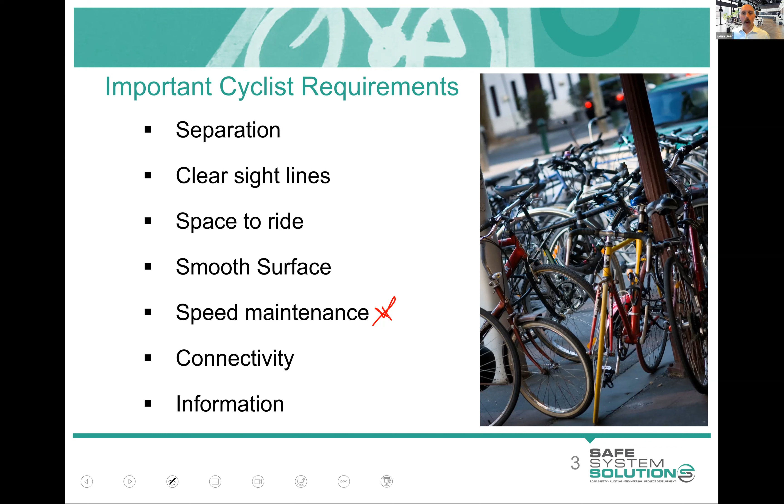Now, there are these high-level principles to think about with cyclists and cyclist requirements and safety, and I've listed them there: separation, clear sight lines, space to ride, smooth surfaces. Speed maintenance is an interesting one, and I will come back and explain how that's a safety-related thing. For a rider to be able to continue at a certain speed, not stopping and starting. Connectivity and information, to warn, inform, guide, and the like. But we'll get into it.

Really, we want auditors to think like cyclists and think, where am I going to ride here? Would I feel safe doing this? Would I feel safe turning here? Oh, if people open their doors, am I in that dooring zone? All of those questions. And most auditors have ridden bikes in their life at some point, so they can get a good idea of how that might feel.

There are these thematic specialist audits we call cycling audits, where you definitely have to ride through the area, and you really hone in on particular issues for cyclists, and you can sometimes ignore issues for other road users because of that thematic audit nature. Now, sometimes I and the audit team will ride the route anyway, just because we think that's an interesting view. So it may not be a thematic specialist road safety audit for cyclists, but we still do that.

Just remembering one that I was in the audit team for, up in Bendigo, the Napier Street duplication. I certainly rode that one just to get a feel from that cyclist perspective. It's not the way that I would usually ride on that, so I had a look at it, drove it, and walked parts of it as well, so you get that nice rounded feel. I didn't ride it on a motorbike, but that's a possibility as well.

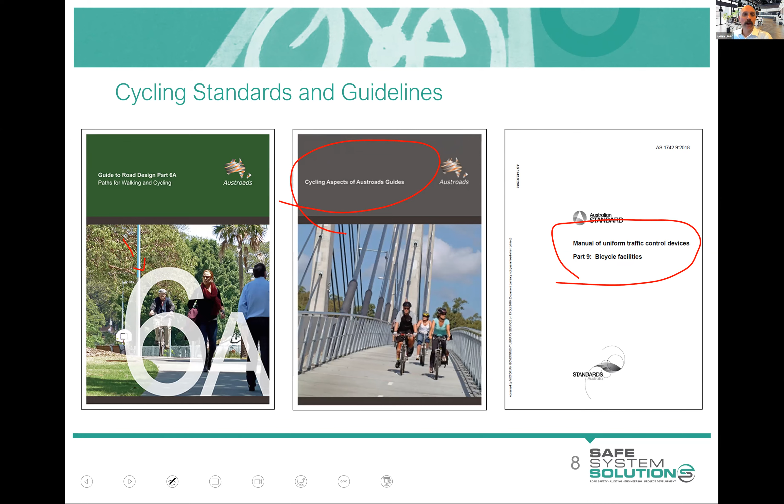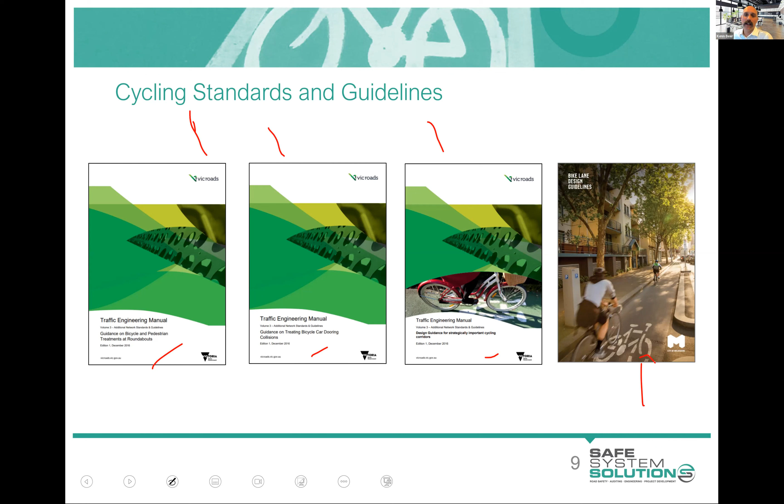That's the Australian standard. This document, Cycling Aspects of the Austroads Guides, collected together a whole lot of different bits and pieces around cycling from different guides and different Austroads documents, and consolidated them into one document, which is a pretty nice document. Then each jurisdiction just has heaps of stuff. We were involved in putting these ones together for VicRoads, which is treatments at roundabouts, dooring, strategic cycling corridors. This is a good one, Melbourne City bike lane design guidelines.

And then if you go broader beyond that, Queensland's got great material. New South Wales has got some good stuff. And then if you go worldwide, we've got the Bible of bicycle infrastructure design, the CROW Manual, and if you're into this stuff, it's worth getting your hands on a copy because it is really pretty groundbreaking stuff. And then lots of jurisdictions are coming out with different things to do cycling audits, prompt lists, technical guides, and the like. I've put a lot of these into the learning management system for you, so you don't have to hunt them down. So you're able to have a flick through those if you want.

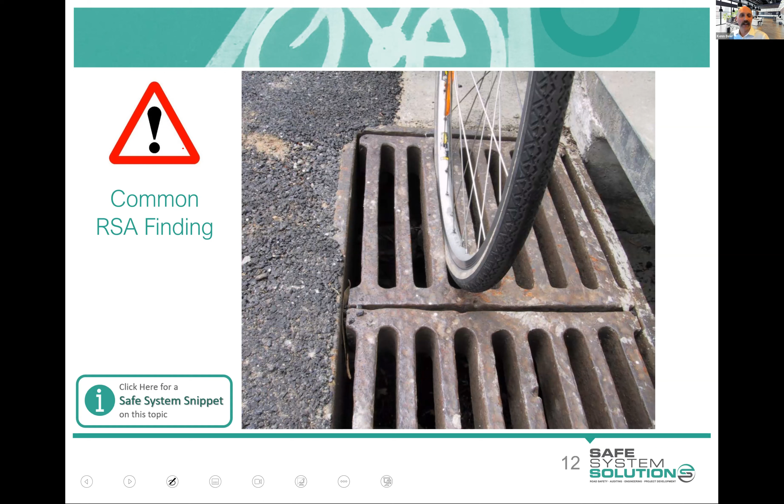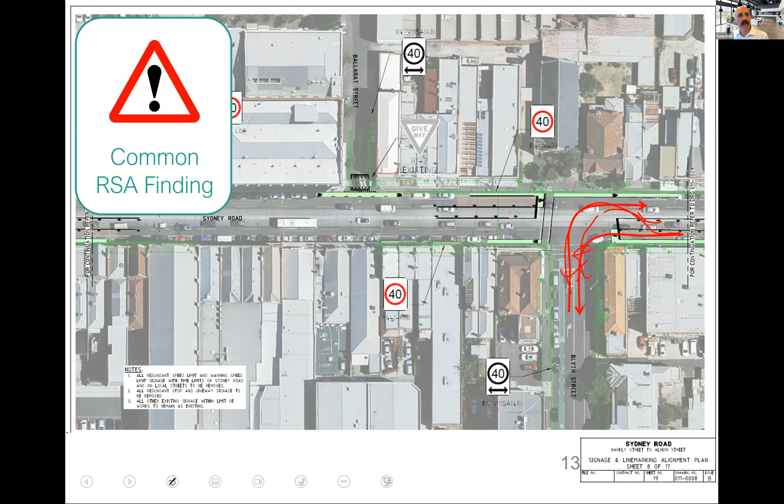Okay, time to get you having a think about it. So what I'm going to do is show a photo next, and I'm going to ask you to tell me road safety audit findings, so issues that you see that could present a risk for cyclist safety, and just type them into the chat.

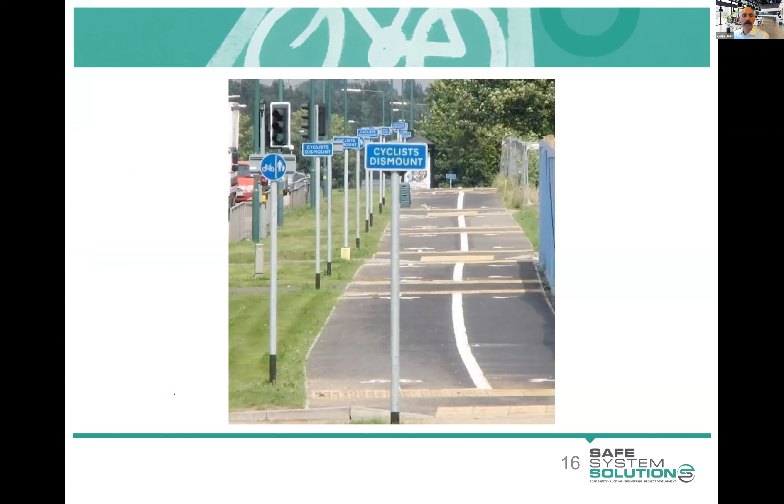But I'm going to keep moving on. But thank you all for your input. Sorry I didn't get to everybody's comments there. But I do want to give you an example of a road safety audit we undertook. And it's got a similar issue that came up, but there's a couple of reasons I want to use this as a bit of an example.

So it was a post-opening road safety audit of a really big subdivision. And we were commissioned by the local council actually to do the road safety audit, which is unusual; usually it would be the developer that commissions it, but for one reason or another, it was the council that ended up doing that. And one of the things that they'd done is this shared path,

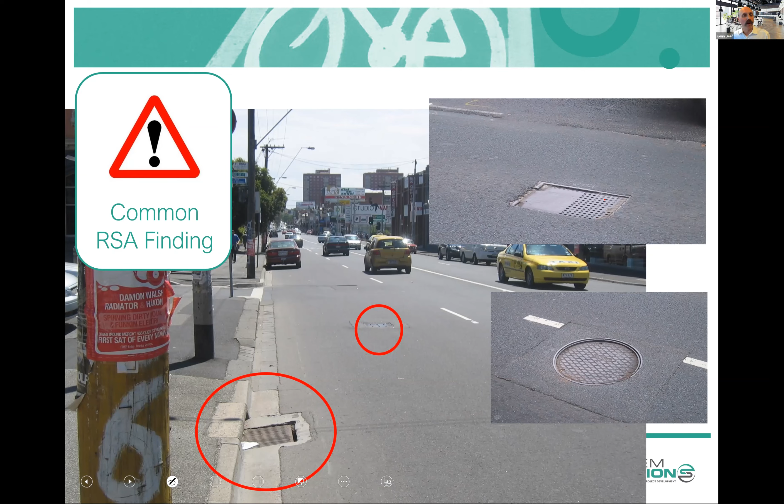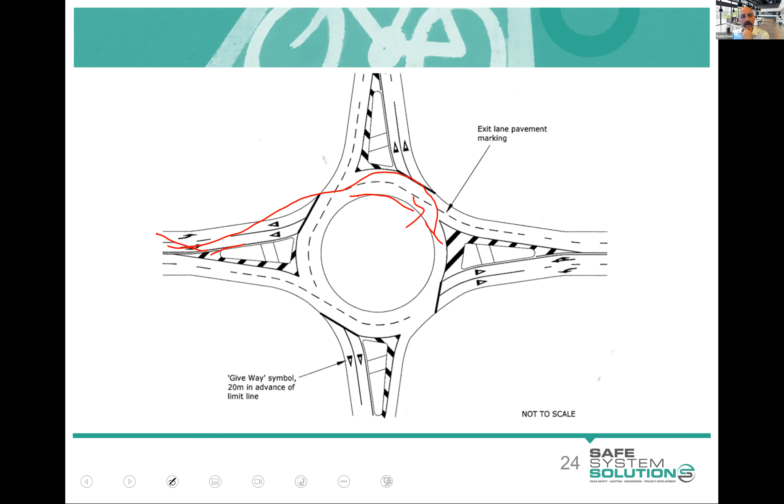Two-lane roundabouts are just hugely challenging for cyclists navigating through them. Trying to turn right as a cyclist, you're either going to have to battle your way across, or you come in and go across, and then you're subject to possible vehicles going through there. So it becomes really challenging from what we can do.

So there are people thinking about how to do this. These are some mock designs - this one has not been built. The idea is to provide that extra circulating area for cyclists and the ability to get out of the circulating carriageway, so cyclists can get out here, maybe even have priority across this one. That's pretty cool, and then they get to a point, squared up so they can see, and they're able to cross in a staggered way.

That, or like in the Netherlands - they wouldn't even dream of making cyclists compete, they'd go straight underneath. The cyclists would get a free run at grade, nice and flat for the cyclists. They'd make the cars go up and down, because they say, well, surely the one pedaling with their own power can have the flat run, and those with motors go up and down.

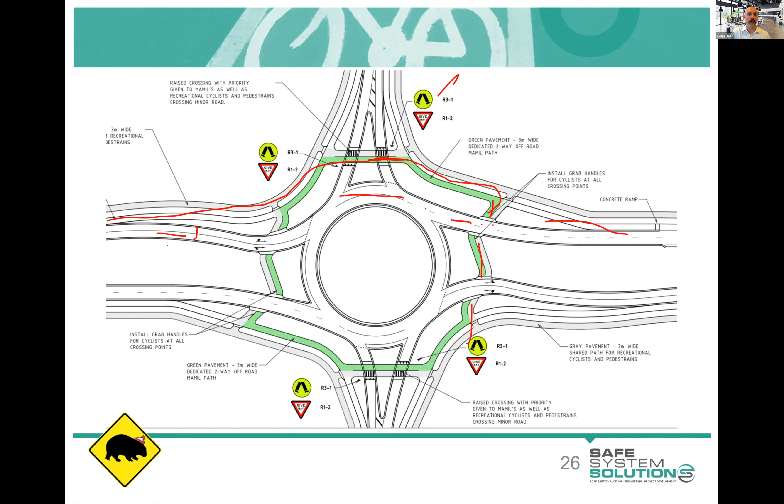So cyclists have priority at all intersections, cars must stop - oh yeah, this is in the Netherlands. Yeah, sorry, I was going to say that. They get a much better run in the Netherlands.

But we're starting to see more Dutch-style roundabouts in Australia now, and there are certainly a number planned. This one has been built - this is the artistic impression of it down at Moray Street. It works really well on these single-lane roundabouts. If you want to turn right as a bike rider, you get off here, come in here, go around, then go out and off you go. And there's a picture of it actually built.

We did an evaluation of this, working incredibly well. It wasn't a crash-based evaluation because you really can't do that with any statistical significance on just one intersection and one treatment - basic laws of statistics tell you that. But what you can do is analyze near misses and patterns of behaviour to get a feel for how things operate. And this one operates extremely well.

We have over 75% of cyclists using the actual facility that's been created for them to make their turns. Okay, there's still a few MAMILs that use the roundabout as they previously would. The raised platform slows vehicles, really impressive, and things are working really quite well. It's an interesting design - you can store one vehicle there, so the roundabout can still have some movement going around while the vehicle waits for cyclists and pedestrians crossing.

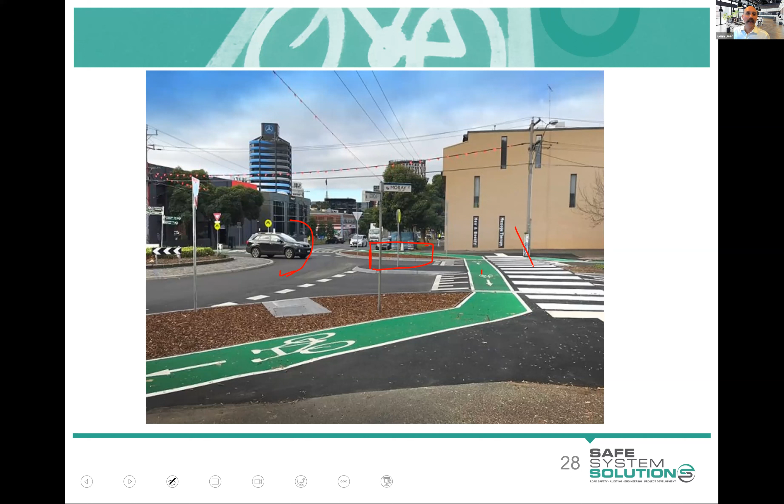Another interesting one - as a road safety auditor, you've got to put yourself in the shoes, or in the saddle I suppose, of different riders and how they might think about it. Here we've got a design with lots of interesting things, but this little bit is of particular interest. The idea is that a rider wanting to do a right turn would come in and pause there, in this little area - one of our designers calls it the MAMIL pouch - for somebody to pause and decide when to go.

There's aspects of it I like, and aspects of it that I'm concerned with. I'm concerned with where it sits and the proximity to the left turning vehicles through here, and if larger vehicles tracked through there and came around and they're paused there, how many cyclists could you actually store there before they're spilling out into the lane?

Michael's asked a good question: why not on the other legs? Well, these are the dominant turn moves at this site, but you know, that's there. Yeah, these are good questions to ask.

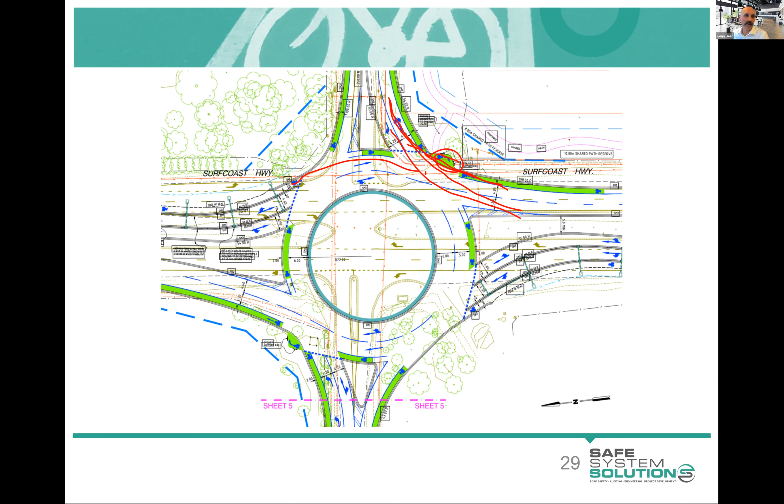So something you may decide to point out. You could remove them, consolidate redundant signage, or look at cyclist-friendly signage. There is stuff available, motorcyclist-friendly signage too.

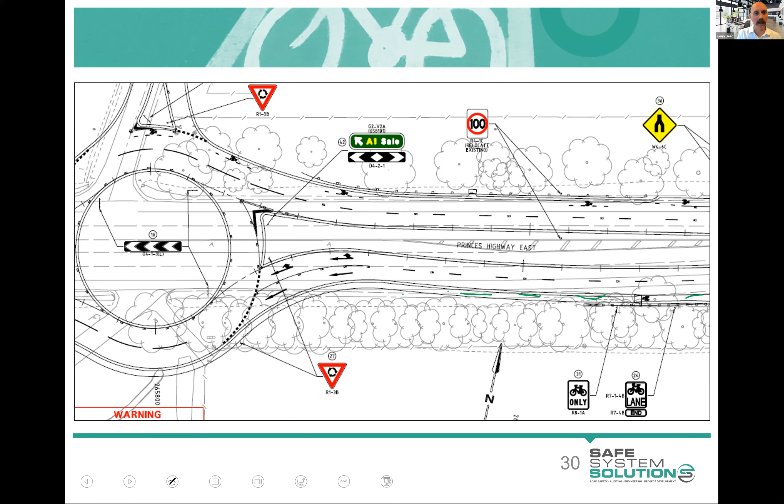So this is an interesting one. Again, if you're doing the road safety audit of it, you can often look at this and say, okay, cyclists come up here and then they're given their own facility through here. That's pretty cool, so they're separated away, at least going straight. You think, that's quite nice.

Then maybe in the post-opening audit, you're out there looking at it and you go, well, they built it, but is it obvious that's where a cyclist is meant to go? That's purpose built for bike riders as part of this roundabout—it's not a footpath. However, a cyclist coming up here, what would you think? I would naturally go, well, I'm going to now battle it out with the high-speed trucks and cars in the roundabout. They can't go up on the footpath, and okay, they've got a little cyclist-only sign—is that going to be good enough?

So these are the kind of things you might pick up, and I think an interesting solution would be to just do a little bit of green paint through there. Now, that's not the traditional use of green paint on our network. Green paint is used for conflict points where a car can hit a cyclist, to warn drivers that there could be a cyclist coming. But green paint has started to be used more and more as a guiding device to try to get cyclists to go in certain areas.

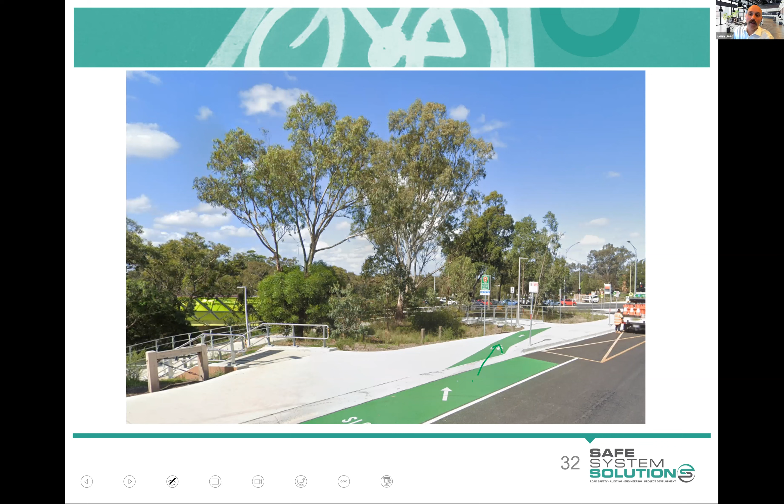There are definitely injuries and some serious stuff with the cyclist actually hitting the door, but it's a really challenging thing for us to address in a lot of road environments, and it takes a significant alteration often for this to happen, especially on roads like Sydney Road, where the parking lane is not a permanent parking lane—sometimes that's a running lane. So if you did too much, even minor stuff like painting cyclist markings there, and part of the day that's the middle of a lane, it's not going to be a good thing either.

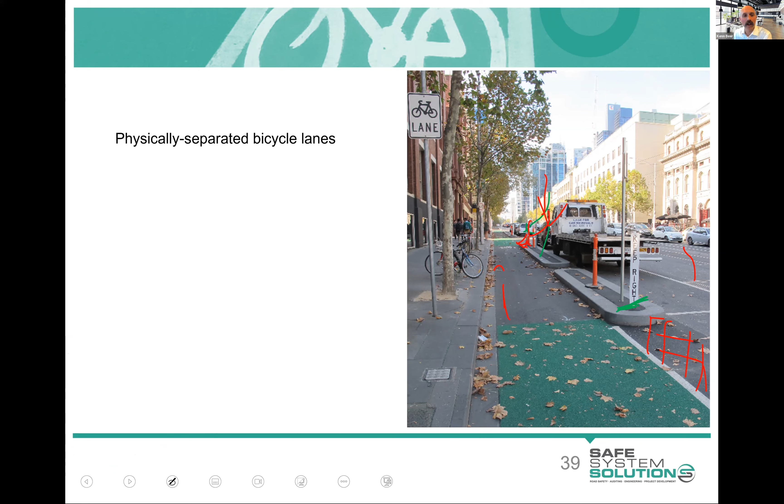As I mentioned, for determining sight lines on it, use the rider speed of 20, and I can talk you through that—that's what the bike rider sees. One little tip again is if you're auditing a crossing like this, look right up to the next crossing and the one behind you, and see, are they the same? Is it confusing? This is one I've got a particular interest in.

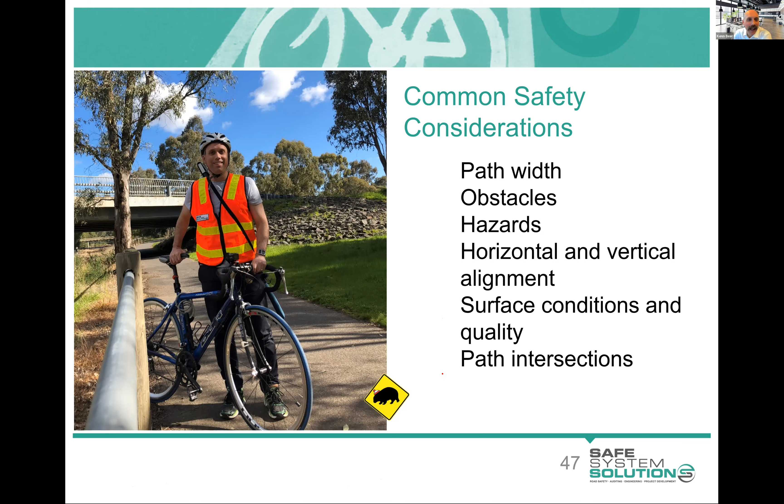Intersections: some just standard principles around intersections, which are pretty good principles for normal intersections as well. Clear priorities, good sight lines, advance warning, sign guidance, 90 degrees if you can to open up easier sight lines, or sight distance checks, and reduce speed.

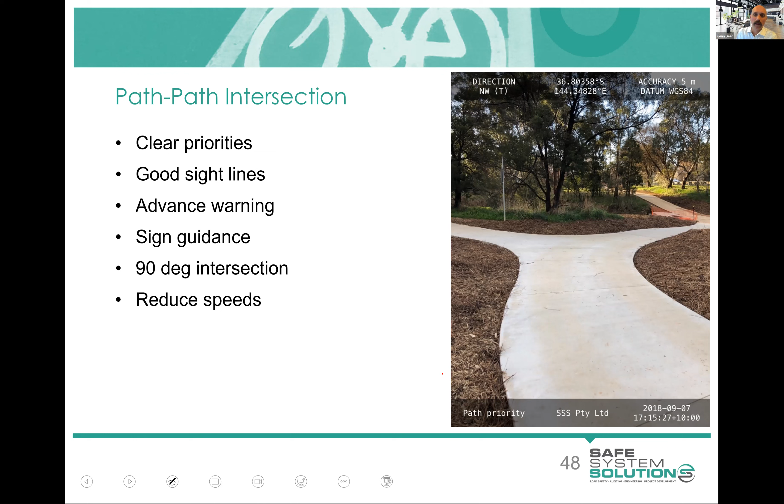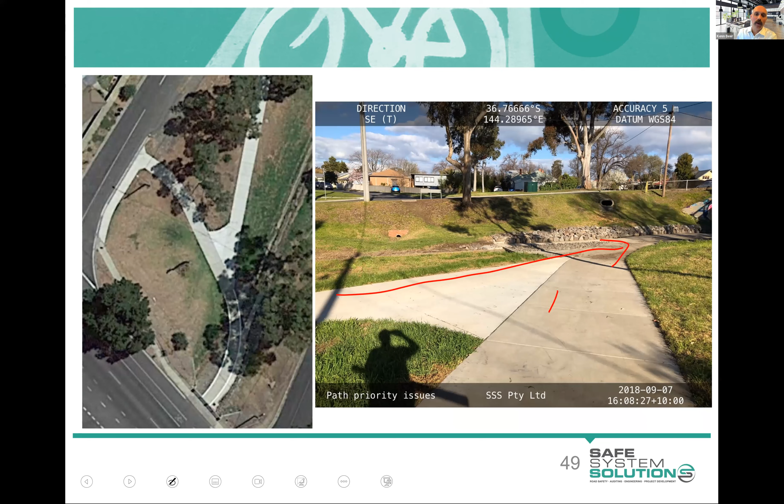So I suppose here's an example. One's a little bit confusing, and depending on how many path users you've got, it just could be a little bit strange. Here's another one where I think it's actually confusing. Priority actually would be for that, but it really doesn't look like that as to how it would work.

Drop-offs. Yeah, so you've got to think about the fact that shared paths often have dogs and kids and all sorts of different bits and pieces. So if we're having cyclists going along at a bit of speed, we're thinking about not just what's on the path, but what's just off the path as well.

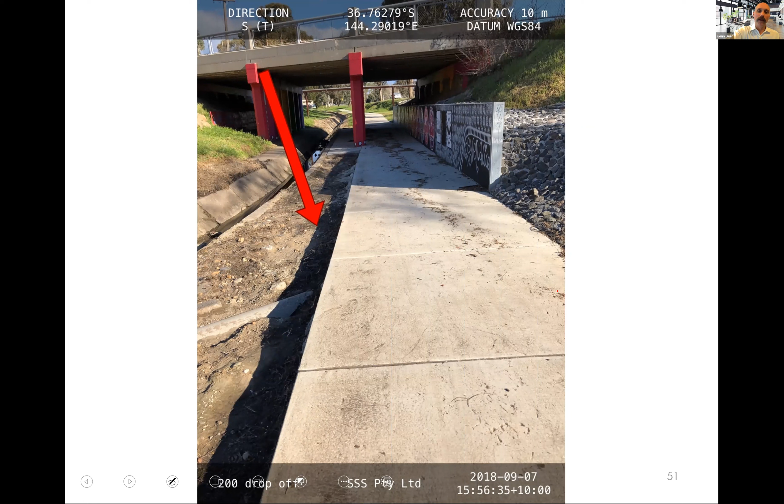Drop-offs. I suppose actually I might as well mention this while I'm at it. This is another little tip. When we're doing these and a lot of general audits, I often use this app, and there's heaps of them available, but they geotag your photo, which I think all photos are geotagged anyway on your phones these days, but it tells you exactly where it is, where you are facing. You can put a quick note while you're out there to remind yourself.

It tells you when it was and where it was taken. And then take these shared path audits, doing big lengths there with a colleague, and you're able to just get all your hundreds of photos and hit map, and it just lines them up to where all the issues were. And then it's easier to sort through them, and you take that issue and plonk it in as a finding, and off you go.

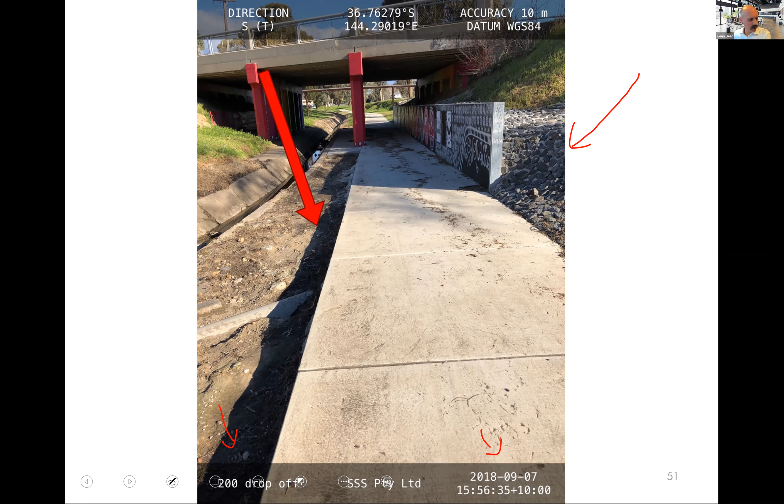So that one's called Context Cam, and there's one Solo Locate or Solo Geo Reference or something. So, anyway, as I say, there's probably hundreds of them available, no doubt. But something to make your life easier. Solocator is another one.

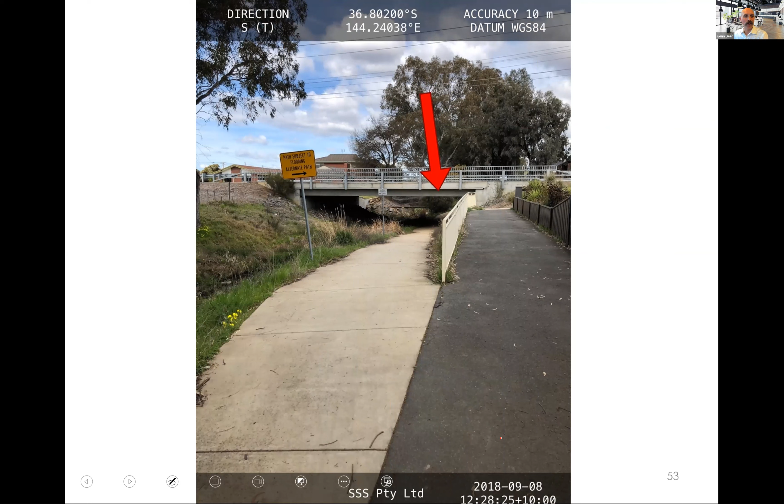Anyway, hazards near the path, as well as within the path, and thinking about, are they retroreflective, how they look at night. Often, these paths are in flood-prone areas, so debris and the like. Thinking about fences.

So not catching foot pegs, pedals, handlebars. So we want to use particular cyclist-friendly fences, and there's lots of good guidance and standard documents on that for what those fences are and how they should look. So there's an example.

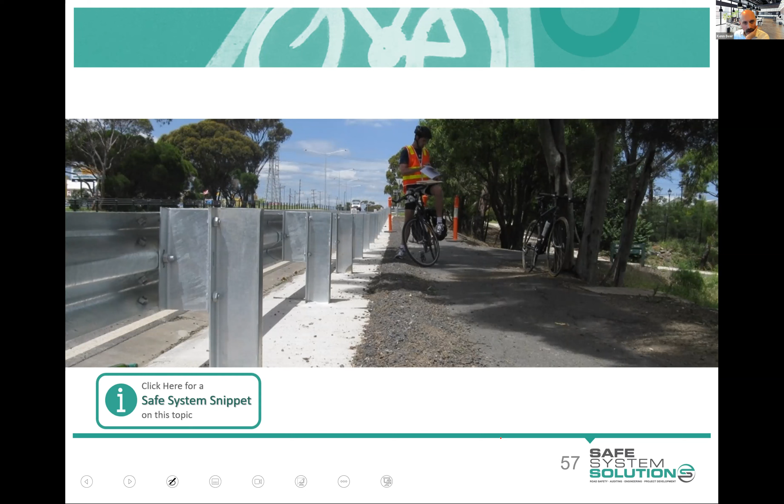Have a think about the back of guardrail systems. So this is a new job, and great credit to the design team for thinking about vehicles leaving the road and possibly hitting cyclists and vulnerable road users, and so they protected using this guard fence. But the back of those posts become a significant issue for cyclists and possibly pedestrians as well. So something to have a think about as an auditor, and you can suggest backing rails on it, so back-to-back systems or post caps and different other things.

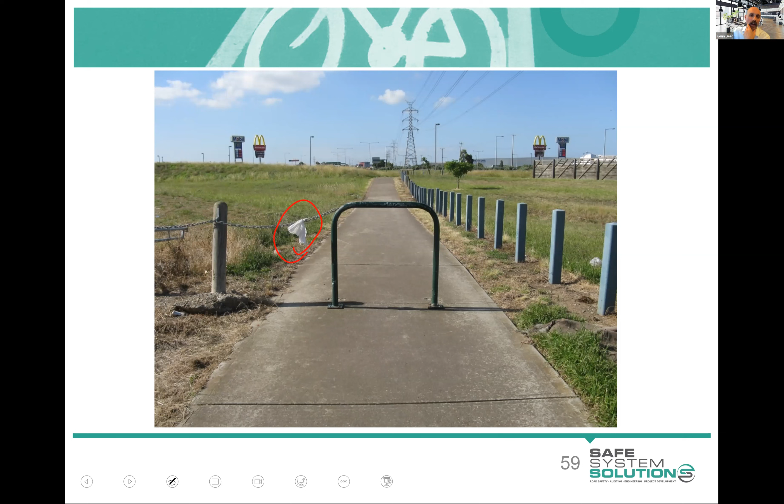And thinking about hazards in the path. We don't like to do this anymore. There's different ways to try to lessen the ability for people to go in and hoon around in there. This one's going to be particularly bad. Somebody, I reckon, tied a bag to that to try and warn other cyclists at night that they're about to get clotheslined by the chain. So having a think about that.

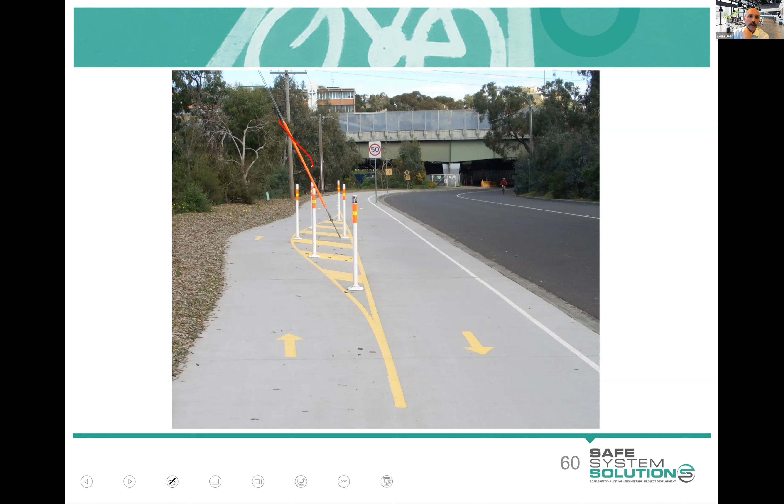I think this is a good example here as it comes up. I think they've done well here in terms of flexible bollards. So they flex at the base, really clearly delineated, the cable stay, good line marking, retroreflective stuff. I mean, ideally, they wouldn't put a cable stay in the middle of a shared path, but sometimes this is unavoidable for reasons, and I think it's a good example.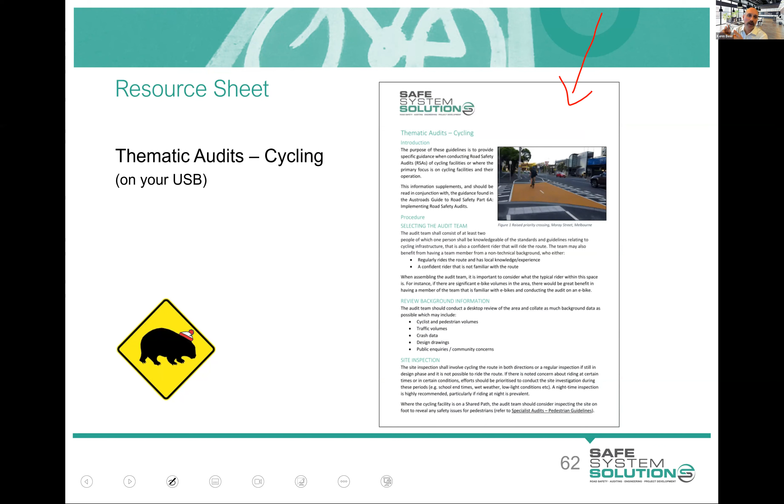So we did these fact sheets on different thematic audits, so cycling, pedestrian, motorcycle, and we've put them into your learning management system, so not your USB, your learning management system. So you can have a look at that, flick through. It just gives you some tips and hints on, if you're doing that specific thematic audit, how you would think about things a little bit differently.

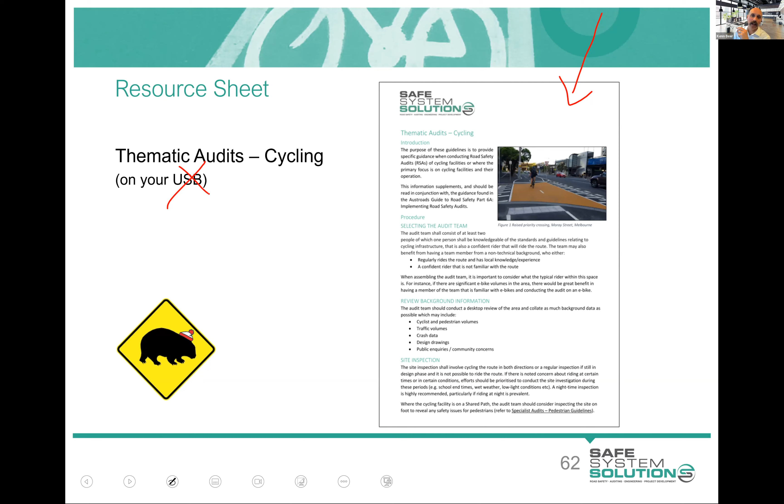Can you do that straight into Google Earth? I assume that's the photos. Yeah, they'll drop straight into Google Earth and they'll just map exactly where you took the photo. I think that works with pretty much any iPhone or Android phone geotagged photo. The only advantage of that app was it gets annotated with different bits and pieces, so you can remember exactly what you were thinking about or what you measured.

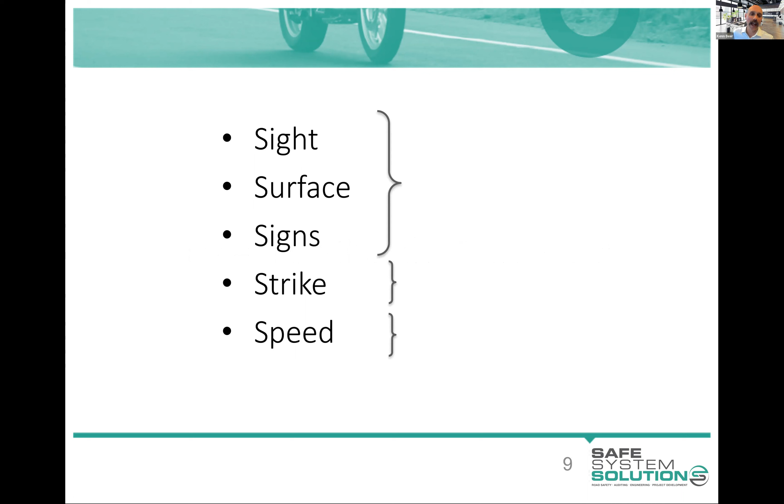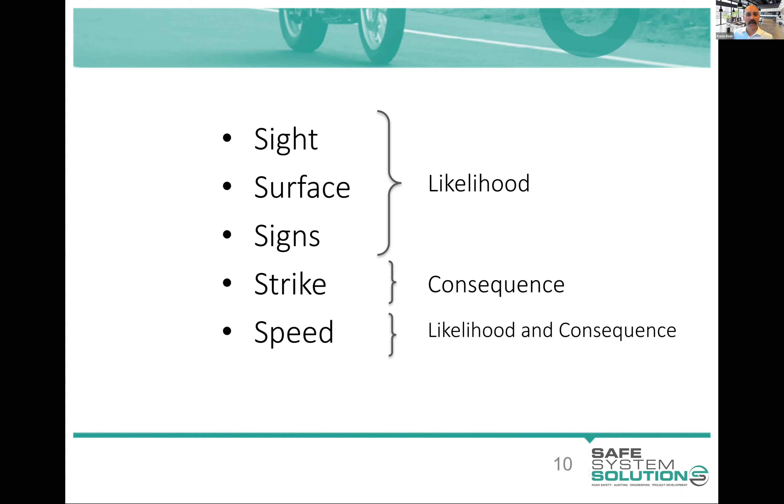So when we think about risk, we are thinking about likelihood times consequence, and that's your risk matrix, isn't it? And you're getting good at that now. When we think about those 5 S's, being able to see the rider, the surface, and the signs, they're the likelihood of crash. If we can improve those, there's less chance of a crash happening. The strike is about the consequence of the crash, how bad it's going to be. And the speed can alter the chance of a crash and the consequence of a crash. So it's a double multiplier there. So let's just jump through these very briefly, touch on each one, and then point you at some other stuff.

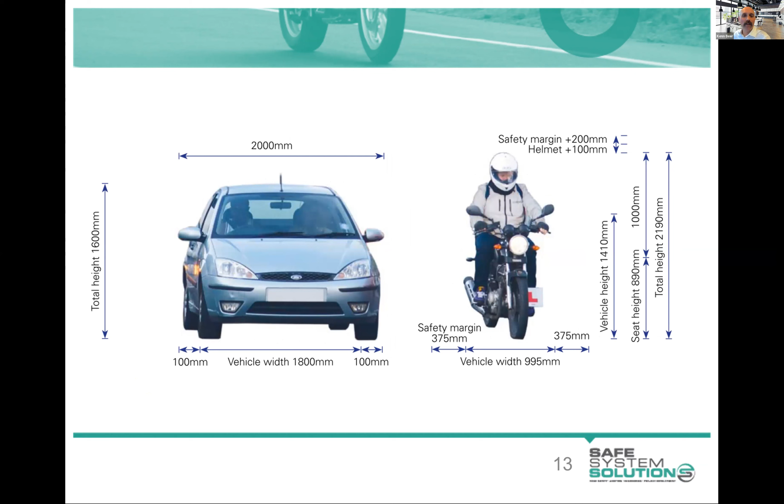Even where vehicles are going to stop, that dynamic visual obstruction is something that, as a road safety auditor looking at a design, you think about: not just what's physically there or going to physically be there, but how are those dynamic visual obstructions going to occur? Where are vehicles going to pause? Can we see riders?

And providing that sight line for a rider at what's coming up ahead. And if we can't do that, we really need to be very good with our signage so the riders are aware of what's coming up.

Prize, if you can tell me the official name for a curve that does this, that sort of tightens up on you. So some people might call it a double radius curve. So you've got one radius there and you've got one radius there. It tightens up. No, nobody's quite got it. We've got a few ideas. There it is. Michael got in there with a compound curve. Thank you. That's its official name.

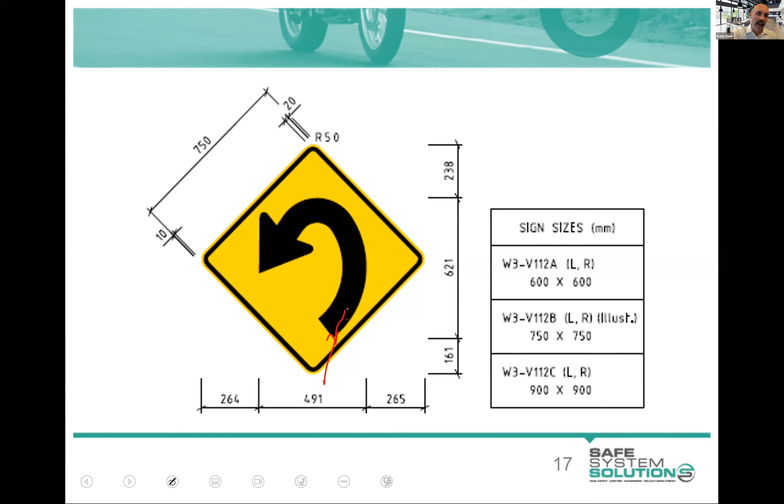These curves are particularly bad for motorcycles. Not great for cars, but cars tend to have that sort of luxury to lose traction a little bit and correct and carry on. If a motorcyclist comes into here, they've set their line and speed to a degree, and they'll be very influenced by what they can see. So yes, we might have given some advanced warning, some speed advice, but they can see a curve and they can see how it goes, and that's a big factor in how they consider it. And then it tightens up on them, and they're in a lot of trouble there.

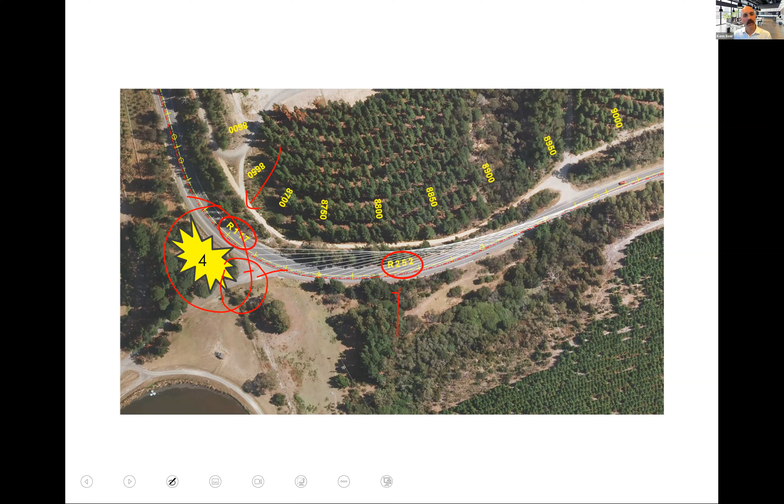So these curve tightens signs are actually highly effective for compound curves, and really, I think, should be part of your arsenal to combat run-off road issues where there are these. So putting those into your audit reports, I think, is a good one. Here's an actual example where we see a 252 radius curve going into a 117 radius curve. So tightening up, unsealed road, so we're going to get some gravel wash onto the sealed surface, and 4 motorcycle run-off road crashes at that location. So it just shows that combination of risk factors playing in there.

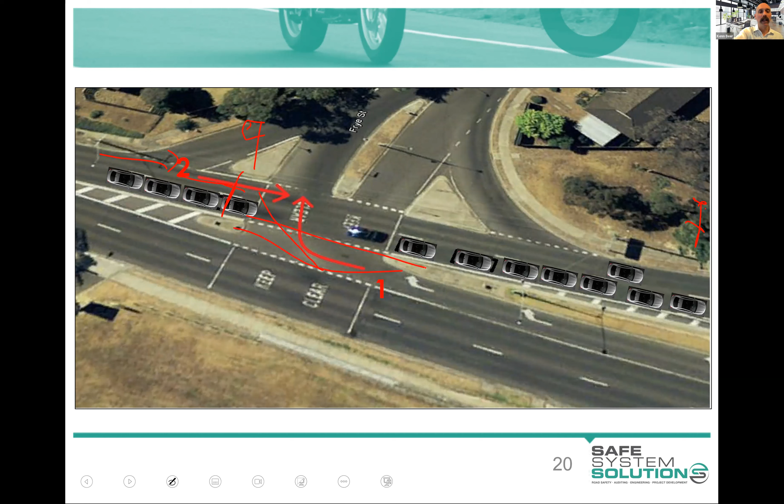Now, what can we do about it? And I use this example in the Making Roads Motorcycle Friendly courses and the like. Well, lots of options. You can link your signals to whatever signals are up here, and you could have something there to stop the motorcyclist. You could bring your hold line back a bit. I mean, this is a massive keep clear. But that would open up sight lines for both the vehicle turning and the motorcyclists coming through. You could look to close it off if that's a possibility. You could raise the area. So lots of different possibilities.

There's another one. The surface, some basic physics for you here, but riders lean as they take a curve. Center of gravity is then out there, so any traction issues, and we see a lot of challenges for riders. What was I going to say about that? Oh yeah, the motorcyclists we often call the canary in the coal mine when it comes to road surface issues, the first to be killed, and we want to think about that through the curves and on the approach to curves where braking's happening or leaning.

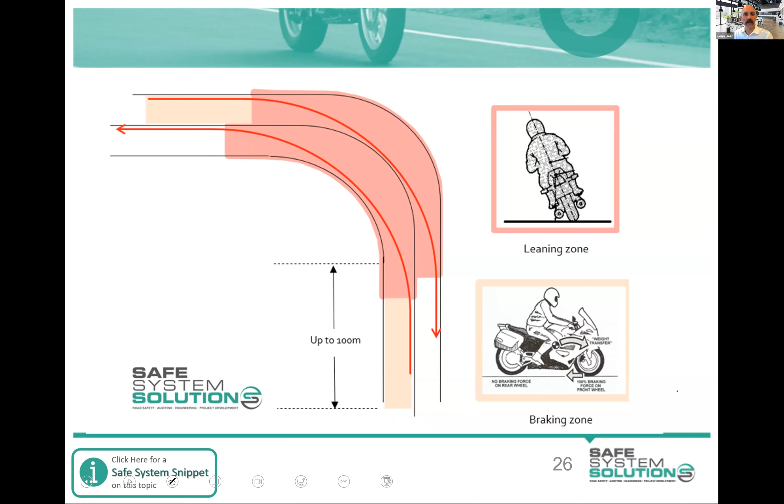I got told by Duncan McRae to fix this diagram. It's not great, the writing and lines, which is a fair comment. So I should fix that. Sean, you can draw me a new one.

But we want these good traction surfaces and good consistency. But we do see depressions in the road, which can make a rider bounce and lose traction and the like.

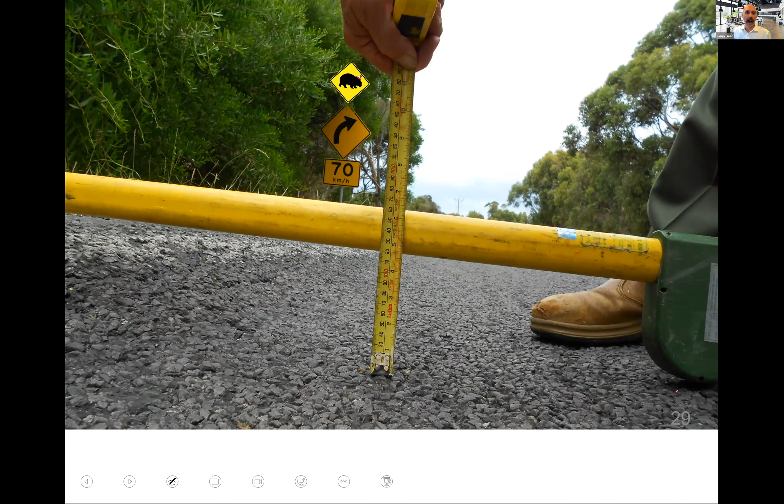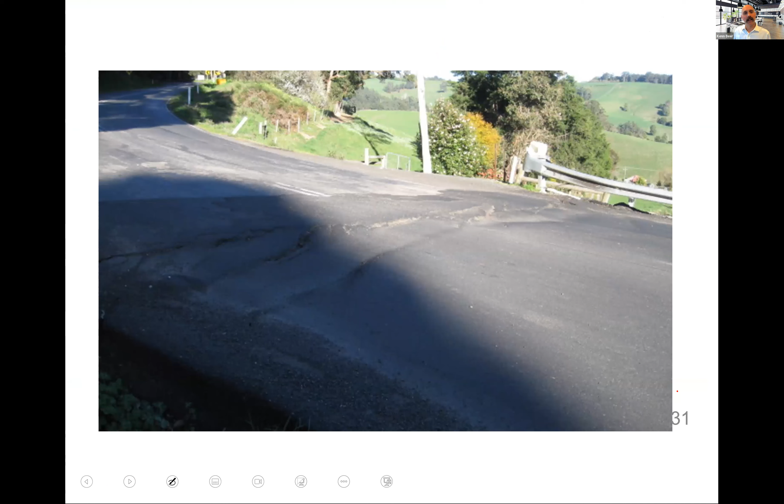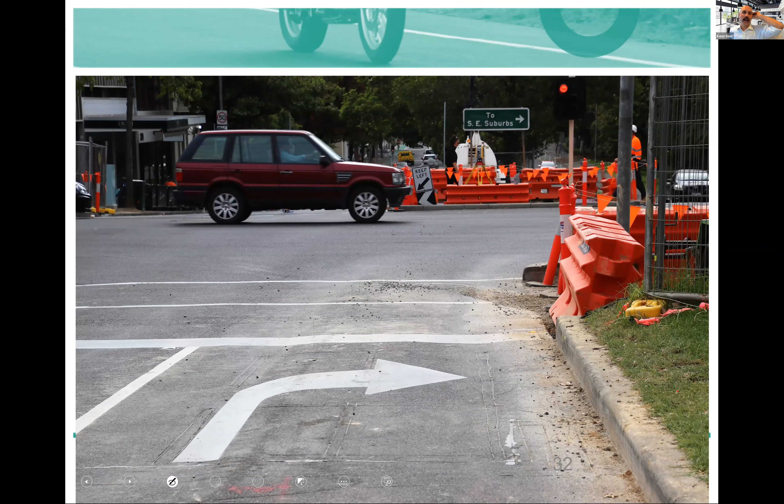Lots of different pictures now of just roads in poor condition, which are not going to be good for riders. Bob's asked a question, which I'm going to come to right at the end, because I do have a picture of an advisory speed sign. Thinking roadworks where we're seeing gravel washed onto the road, mud, debris and the like, and it can be slippery for riders. We're seeing a lot of scooter riders now in the city and a lot of challenges around that, so thinking about this at roadworks as well.

Thinking about patching and the existing conditions, where our patches - we often patch the road and the join is right in the rider's path, and it's probably going to be the first area that's going to break up and open up. So if we can do full width patching, we're in a better position there.

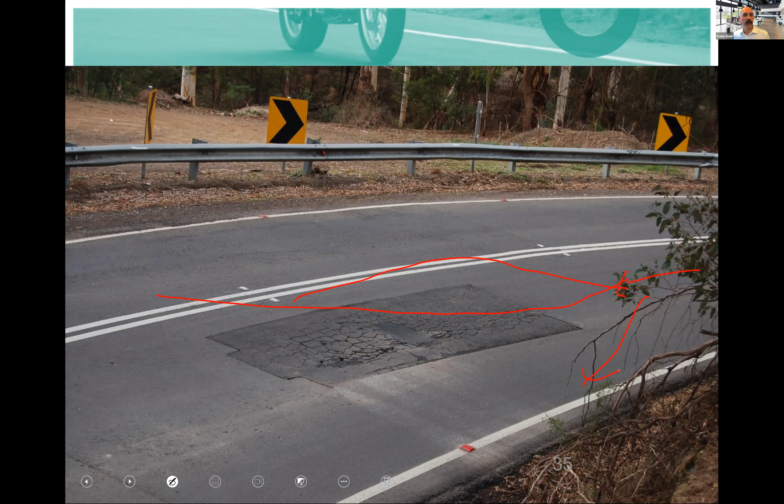Pre-warning of things - this one is on a popular motorcycle route up in Yarra Ranges, and a rider coming around here is fairly locked into their line and their speed. If they encounter that unexpectedly, really it's a case of pull the bike upright and go through it, or go to the outside of it. The idea of going to the inside of it, we're going to see some big issues. So any issue like this needs to be really well advance-signed until it's fixed. Ideally, if we do better patching, we don't need the advance warning.

Ideally we don't have these in the road environment. If they are there, we can look at high skid resistant surfacing, kind of like skateboard grip tape essentially, and colouring them helps out a bit as well. Try and bolt them down properly when doing that.

If you're looking at designs, say for a roundabout or any new design, and you're noticing services and their covers in areas where people will be travelling, think about motorcyclists and cyclists. Ideally at these design points we're getting those out of the travel lanes.

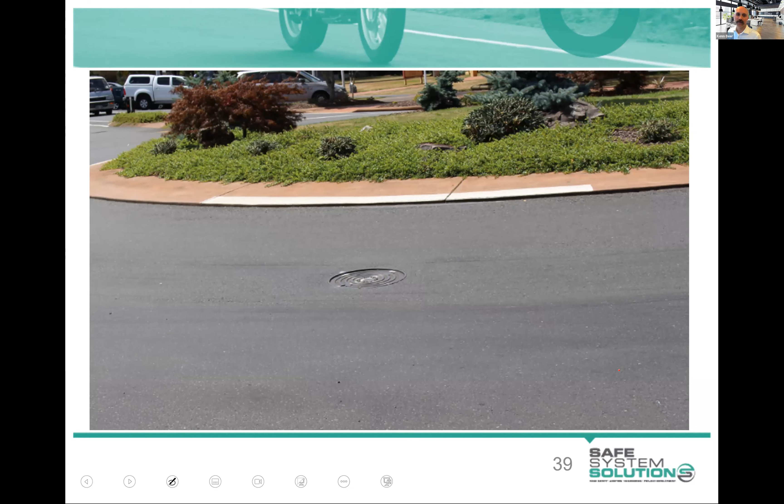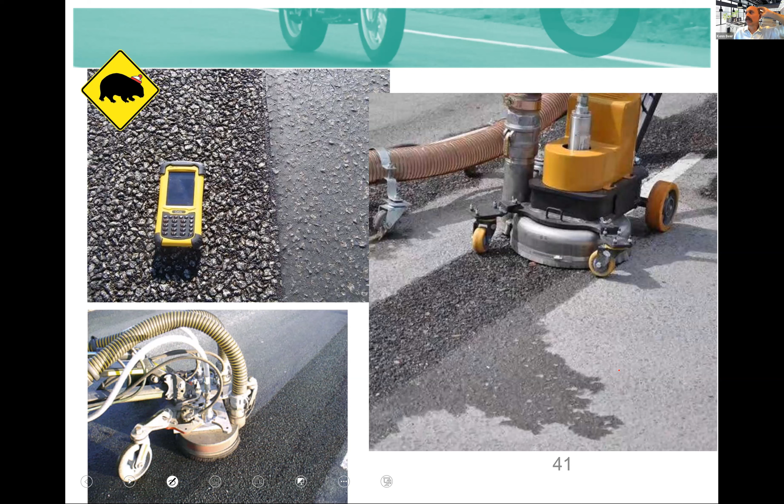In terms of surface skid resistance and the like, we can certainly improve skid resistance with water blasting, high skid resistant surfacing - lots of options in there to improve the surface. Ideally sealing up to barriers and sealing all the way out helps, because if a rider hits an unsealed surface, they really have to pull the bike upright or they'll lose control. I'll get onto barrier systems there in a little bit more shortly.

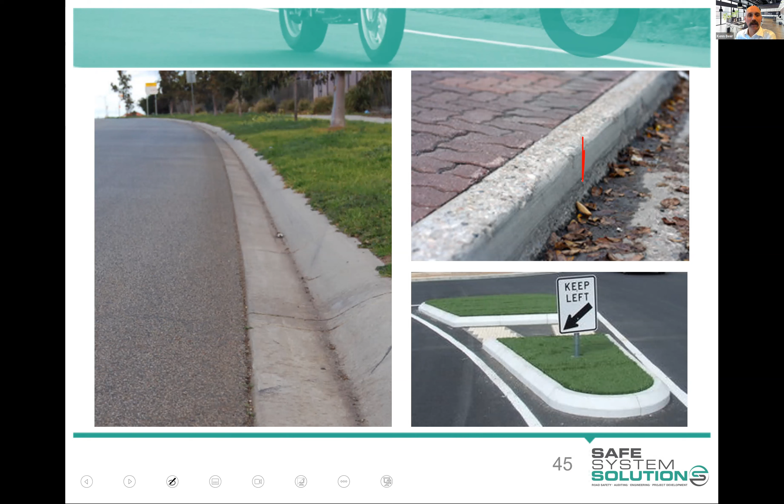Just let me cover curbing. Different curbs are needed for different drainage purposes and the like. Barrier curbs certainly present the most risk to riders - they hit those and come off. But it's surprising how small a lip can destabilize a rider. Here's a little video to show you that.

I showed that when I was in New Zealand doing some motorcycle work, and they said, "Hey bro, come and have a look at our grab rails - we use PVC piping and it just breaks away." I was like, "Oh, I like the innovation, not sure how it would hold up to the sunlight and things like that." But anyway, there's interesting ideas - I just put it in there for fun.

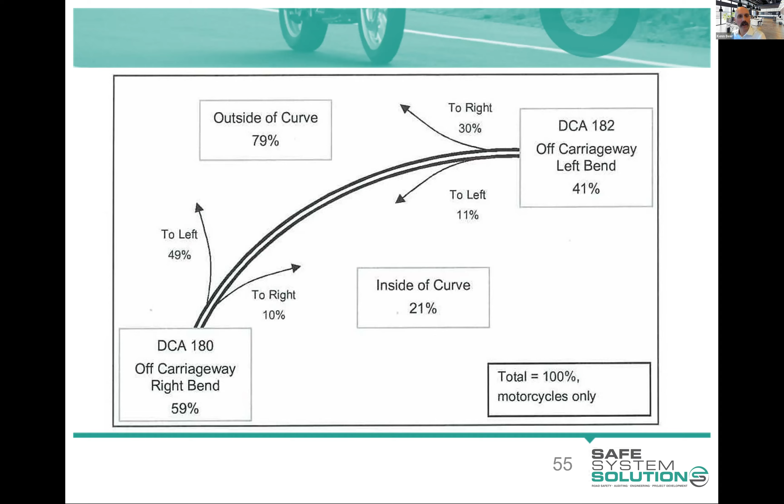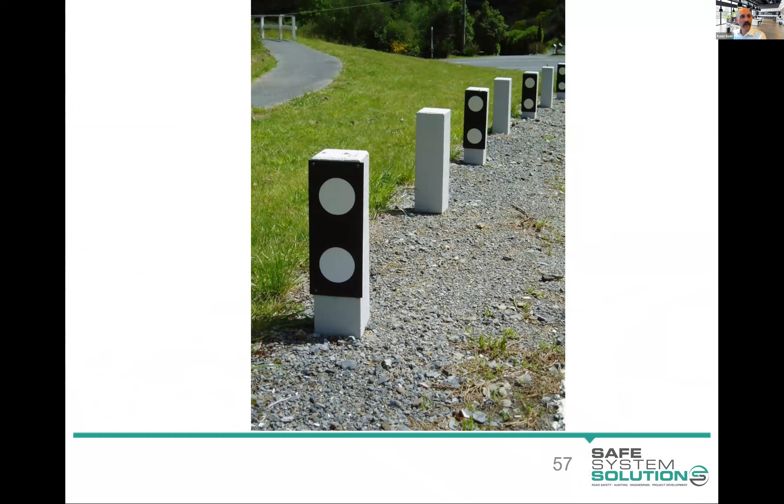So we're particularly interested in the outside of curves on popular motorcycle routes like this one. Here's one where we're seeing a bit of surface issues on a curve, and then we've got these concrete blocks out there, which are certainly not going to be friendly for a rider to hit, or really a car for that matter. But even the galvanized steel posts present a risk for motorcyclists - we talked about that already for cyclists. All of these posts we're seeing are not frangible for motorcycles, they are for cars. So all of these standard galvanized steel posts will just flatten if a car hits them. A power pole will not flatten if a car hits it, but also not for a motorcyclist.

We've already had somebody mention the idea of a rub rail, or I'd term it underrun protection, because rub rail is a particular type that's a public domain system. It means nobody has a patent on rub rail, so you could technically manufacture your own. But there are quite a number of proprietary underrun protection systems now available where you can't make them because you'll be sued. But there's some really great other systems out there as well. So I just generally term it all underrun protection. So you can do that.

Hopefully you can logically see the road safety advantage for a rider if they're sliding at 60 kilometers an hour along the ground. Hitting one of those posts is very feasibly a fatal incident, or definitely serious injuries. If we're able to put underrun protection there and they're able to hit that and run along it, it's going to be more minor injuries and within sort of survivable stuff.

So as an auditor, if you're doing existing routes or involved in motorcycle audits, you're certainly looking at the addition of underrun protection to existing rub rail. And if it's new systems and it's a popular motorcycle area, or an area you just feel has motorcycle risk outside a curve or something like that, you might be suggesting underrun protection, which can be retrofitted to the existing systems.

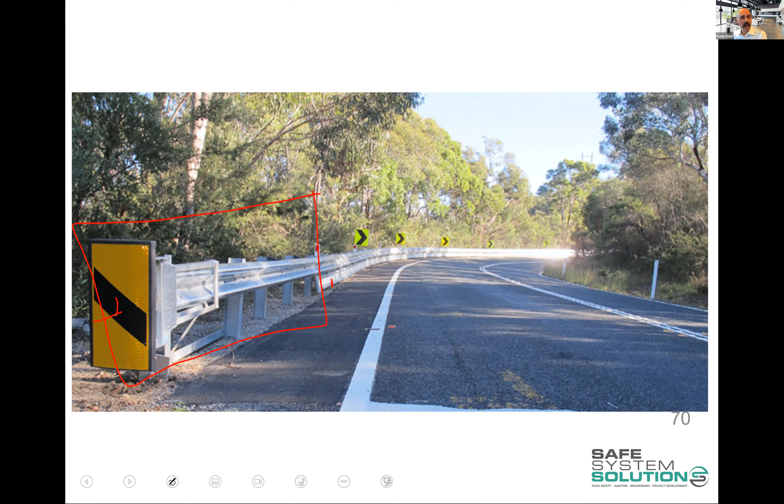And wire rope systems - wire rope systems have copped the brunt of motorcycle anger about barrier systems from segments of the motorcycle community. It doesn't deserve the amount of attention it gets because it's such a tiny portion of motorcycle trauma associated with wire rope systems. It's so minuscule, but it does - the images it conjures up are pretty graphic.

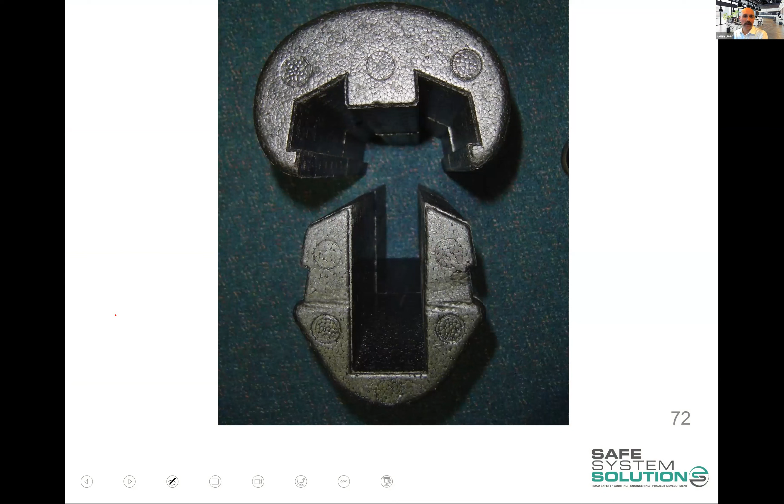And really, one of the things I completely sympathize with is the fact that we don't have any good retrofit systems to make these friendlier for motorcyclists. The best there is stack cushion, or some sort of essentially goalpost padding that goes around the posts. Now, just basic common sense will tell you this cannot be as effective as a redirection device. We're trying to absorb the energy in this very instantaneous thing rather than running along and washing energy off over all of that distance.

Nobody's tested one of these in any official capacity, because they're just not going to pass. This used to be the best you could do back in the day when you had a choice between a type B W-beam or a G4 system, which is not the best for cars, doesn't have great flexibility, versus a wire rope system, which is highly flexible and a wonderful safety device for cars. Those were our options, so you'd be doing everything you can to get a wire rope system in for the bulk of road users leaving the road and hitting these.

Nowadays we have flexible W-beam systems, and I'm getting into barrier specifics, but these flexible W-beam systems perform amazingly well. So opting for those, if you were ever thinking about putting wire rope in with stack cushions, you've chosen the wrong barrier system. These days you just do a flexible W-beam with underrun protection every time.

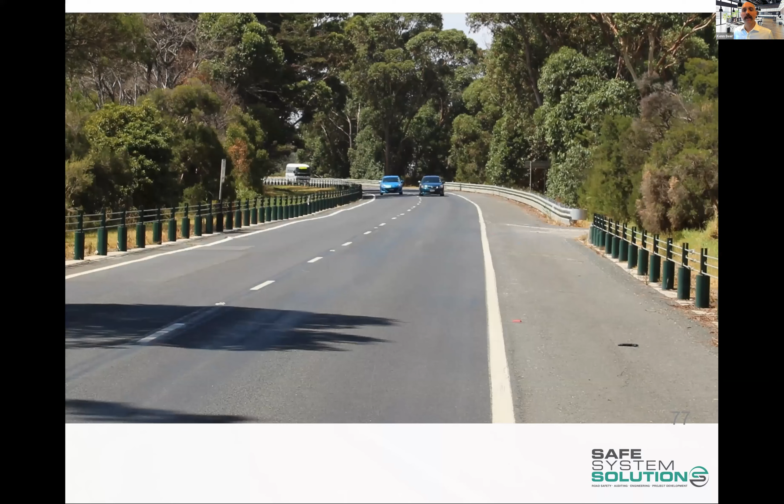I'm going to keep ticking along here. Some pictures of other parts of South Gippsland Highway.

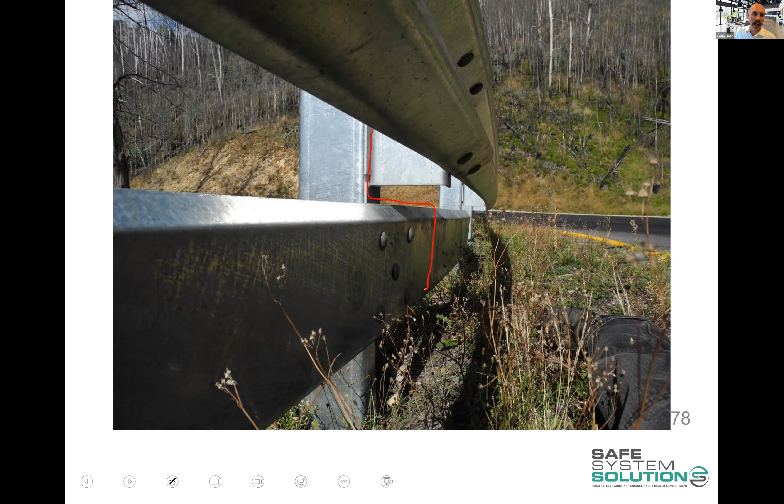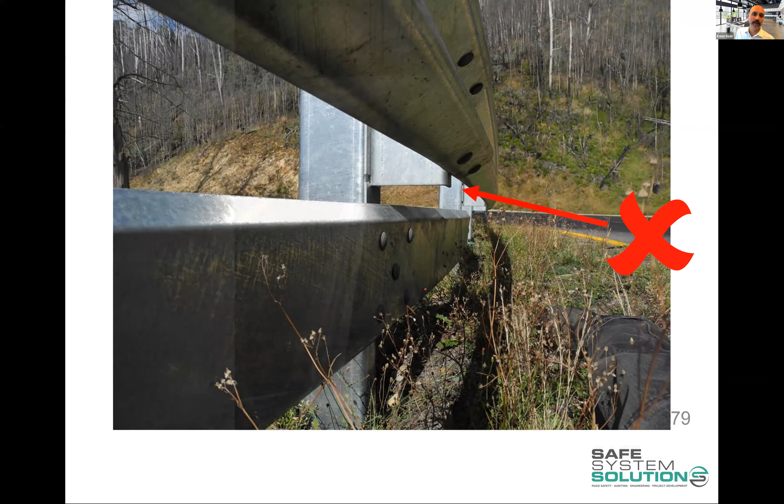Little post-opening tip: if you're auditing and they've put underrun protection on existing barriers, be aware it's a lot easier for installers to just connect it to the post than use the bracket that's meant to sit out, where they placed it. We saw a lot of that happening, so check your design, check the standard drawings, make sure they've installed it correctly, because we got sharp bits there, and we've got gaps, and gaps are not good because arms and legs can get in that gap at speed.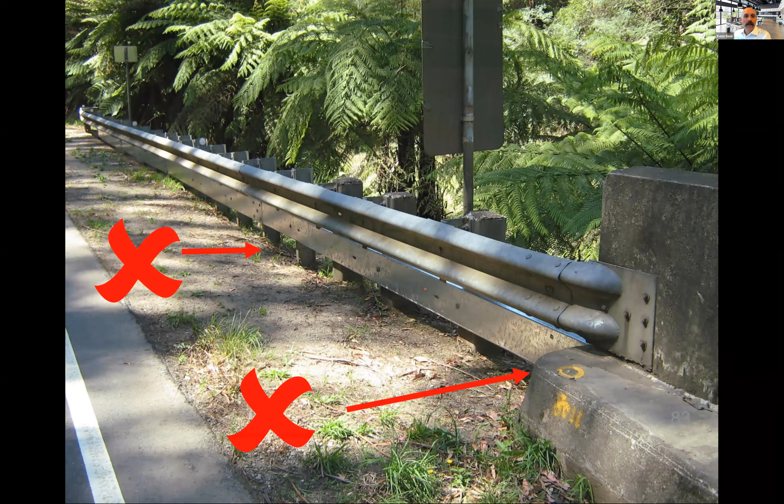And speed, highly important for riders and other road users. In fact, it's one of the, if not the most powerful thing we've got in road safety, managing speed appropriately, and we can do that in a whole variety of ways, not just the speed limit; it's all sorts of things.

The use of advisory signs like chevron alignment markers, chevron alignment markers around curves, can significantly help. Now do be aware though that these are now a strike hazard for riders, each one of these. We're working with Swinburne Uni and the Victorian government on designs trying to get these to be motorcycle friendly, which is a surprisingly tough engineering challenge considering wind loads, torque, and a few other things. But anyway, it's good fun.

So those sorts of things, advisory speeds, and are these relevant for motorcyclists was a question in there. Well, the answer is that's not the point. The point is that we provide consistent advisory speeds throughout a route, and if riders want to go above that, that's for them to know what the curve radius is and what the approach speed would be and the like.

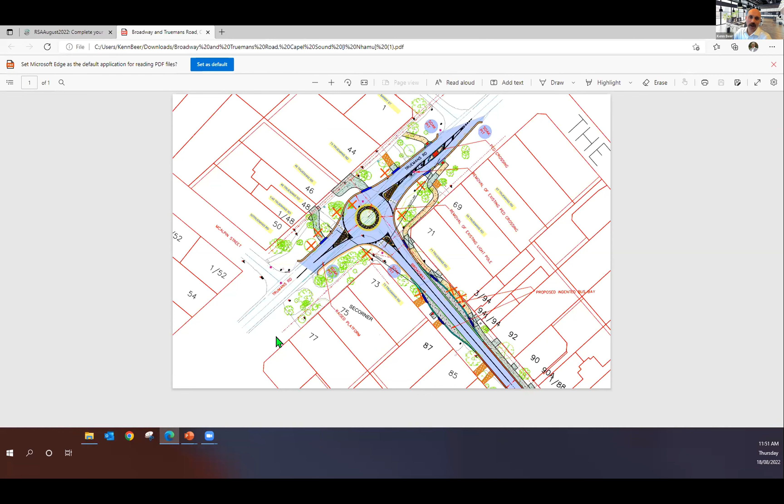And so there'll be different ones out there, different designs, and people will have different things. Here's another one you can see. Some of them you pick have pretty decent designs. Let's try and find one that has less information. There we go, there's a more conceptual idea. You're still able to audit these. You're just doing it at a more conceptual level where you might not have as much detail, but they're building a roundabout there, and you're thinking about general issues that could arise when they build that, or things that haven't been considered.

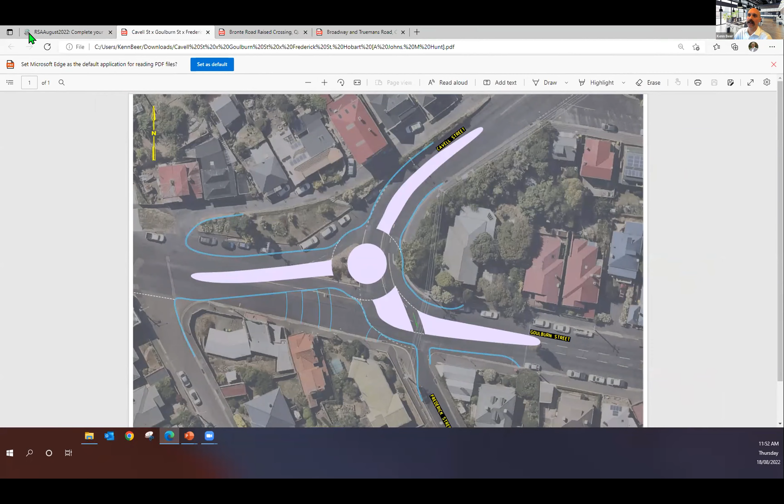So you find your name there, and you can probably see it now already. And you're going to go out to that site. Then you're going to use this road safety audit template to write up your audit findings.

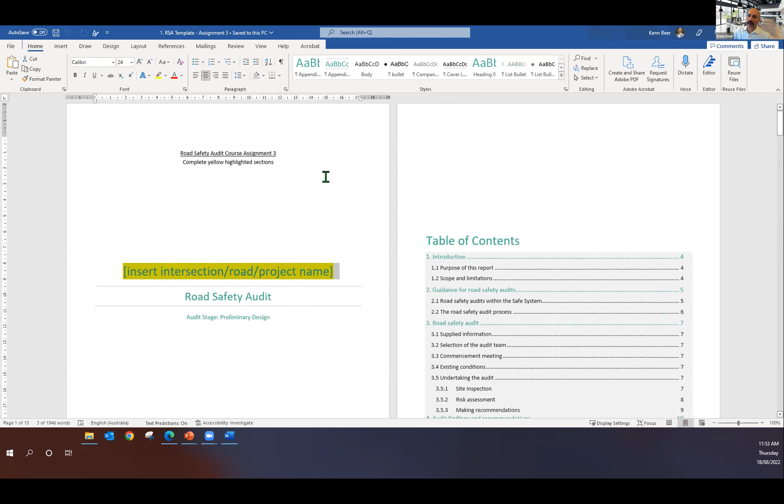So the audit template, this is a proper audit template, okay? And so you can use this for future audits if you'd like, and you're welcome to rebrand it, change it, take it on as your own, okay? But what we've got here is all of this stuff, but all we want you to do is replace anything that's highlighted yellow. So there's a lot of stuff we don't want you to have to work on, and we're trying to keep it nice and easy for you. It should be fairly obvious, okay?

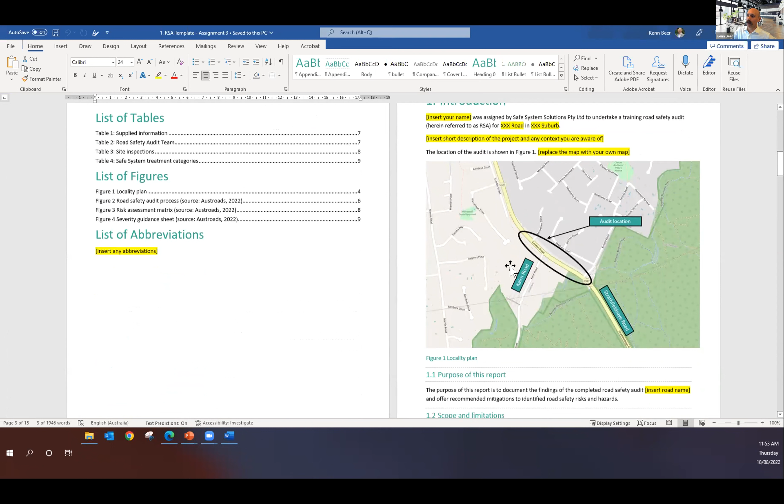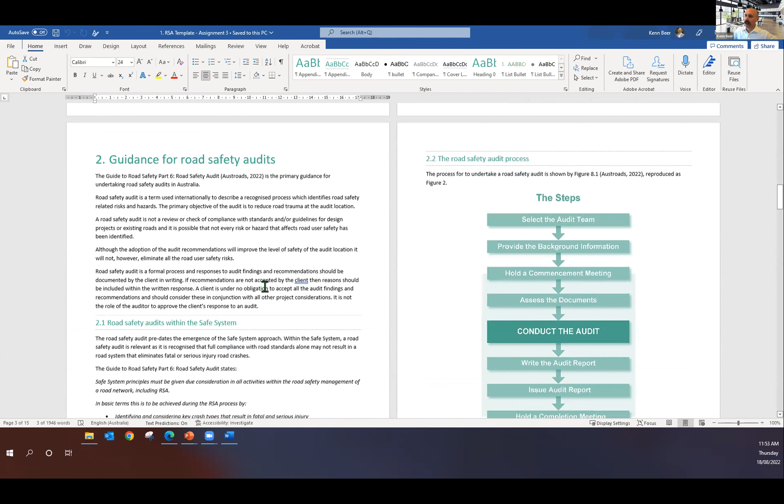And you're going to put a little map in, fill out those bits, a little bit here and there, but it should help you if you're doing future audits. Use these things. We've worked on it to ensure it conforms with the 2022 version of the Austroads Guide. It's good practice unless you're doing an audit in New Zealand. But generally this is good. Or New South Wales, make sure you knock out the recommendations column.

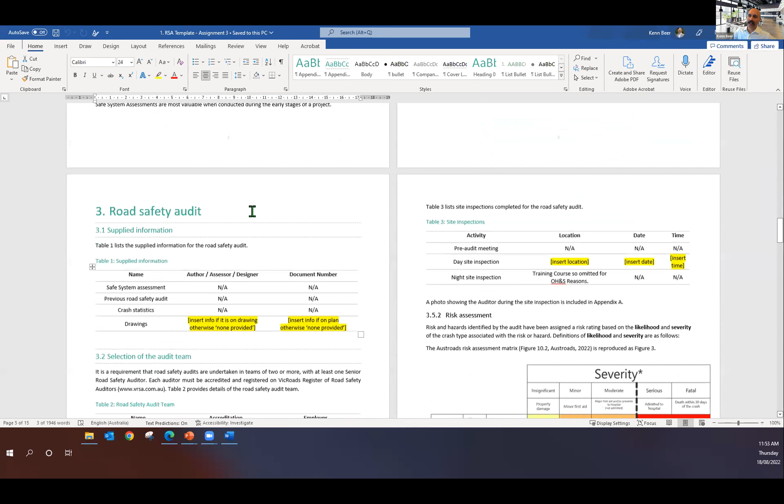So if your drawing has a number on it, put it in there, and a designer. If it doesn't, just put none provided, and put your name there, road safety auditor in training, and you can put an employer if you want.

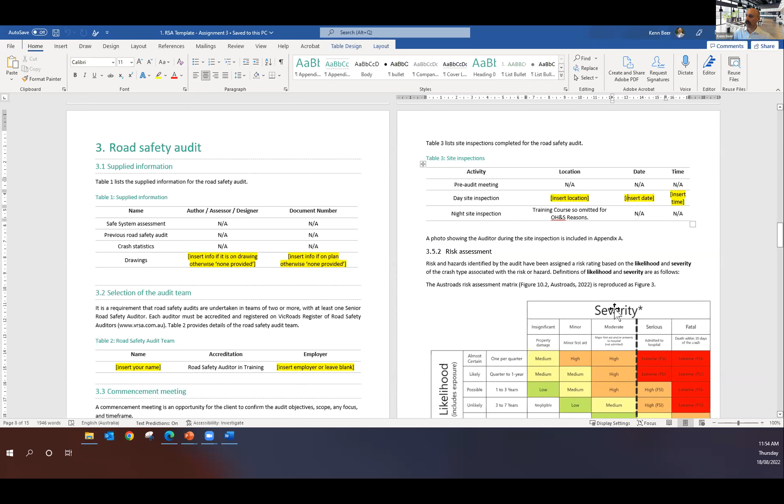You are not going out there at night. You do not go to the site at night. In a real audit, you would. Again, just risk assessment in the course and all of that. We've said we're not going to do that, but you can say where you went, when you went out on site. You're going to be using your usual risk matrix. It's got some more information in there. You can have a look at it, and then you can make some overarching comments if you want.

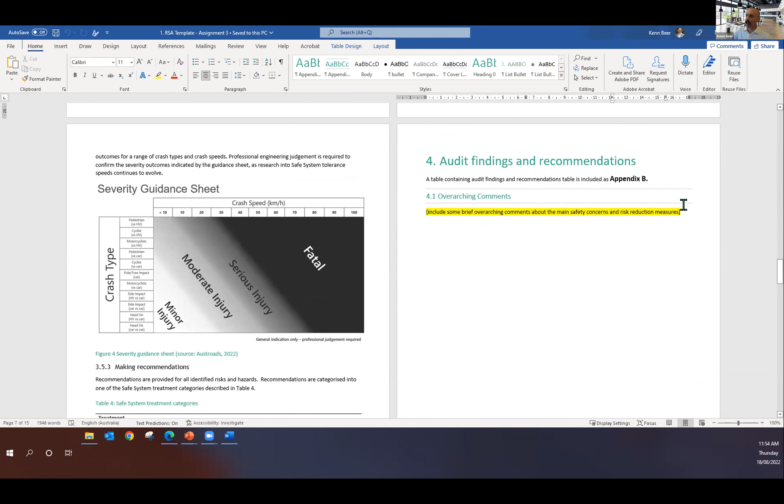And you're going to be signing it. And site photos. In terms of site photos, we don't want you to give us lots of site photos. Okay? You would in a real audit, you'd have lots of site photos. For this one, we just want a photo of you on site in your high-vis vest to prove to us that you actually went there. Because that's an important part of auditing, is to actually go to the site and get a feel for it.

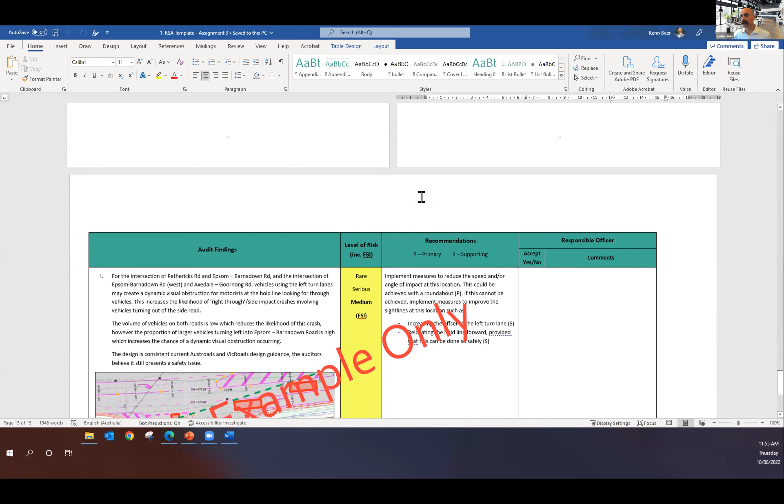How does it operate? Now, we've put the audit findings as a table. Now, you might elect not to have it as an appendix. Some people get annoyed with it as an appendix. We do that just so it's easy for a client to grab that part out specifically. Again, I'll put the example there to remind you, but you should be getting pretty good at this by now because you've been working on it. And you'll see here, 1, 2, 3 issues this time. Only 3 issues. You give us more than 3, we're not going to read them, so don't bother. 3 issues.

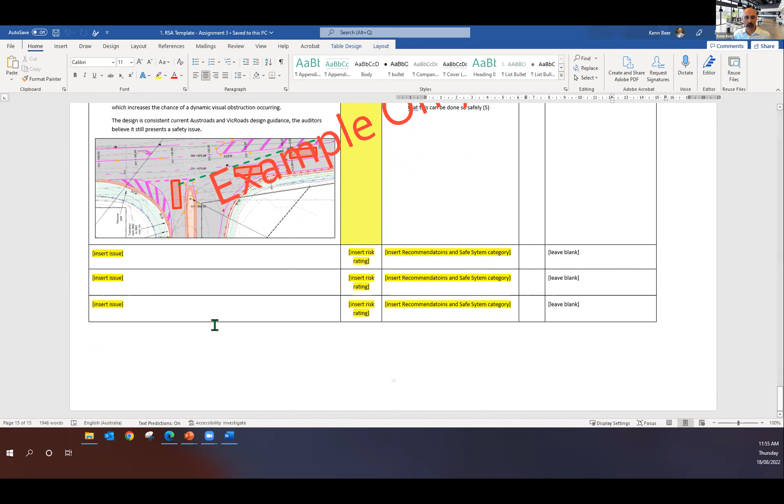Now, if you can't find 3 issues, get in contact. We'll give you a few hints and point you at a few things to think about. Most people don't have much trouble finding 3 issues. They might not be high-risk issues. They might be low-risk issues, but most people don't have too much trouble.

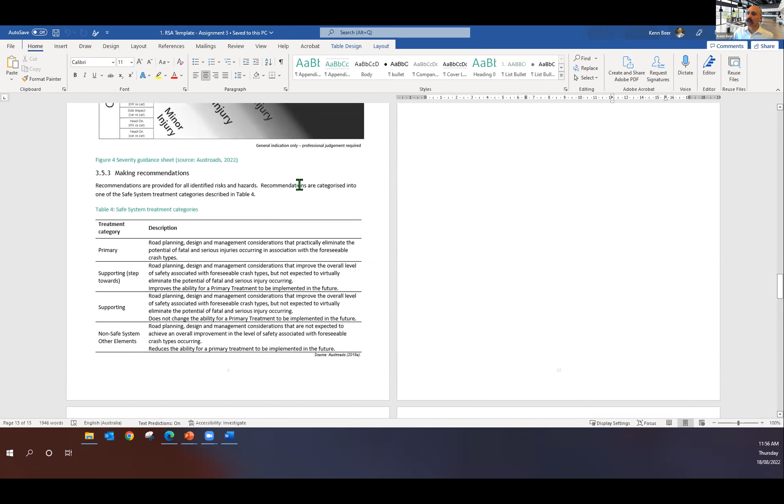So you're going to fill all of this out. You're going to read it, proofread it, and go, yep, happy with that. PDF it and upload it where you add your submission as you're all used to, and you drop it in there. You have 2 weeks to do this.

We do have a session next week, and that's a great opportunity to come with any questions you might have, and we can discuss those. If you've got it as a question, others probably will have it as a question either now or when they're out doing audits in the future. So it's good to ask those and we can discuss them. But you do have a bit of time to do that.

Of course, if you're struggling in any way, shape or form, get in contact. We can organise a one-on-one catch up. We can talk you through it, help you through those bits and pieces. You're going to get in the next day or two some feedback on your desktop one, where you're getting a feel for how you write these up, and then you'll be out to do this final one.

And this is really the final, big exercise you have to do to prove your competency in order for us to give you that certificate. You have 3 attempts at it. You will be given feedback if you don't meet that 80% benchmark, and you'll be able to resubmit and get up there to that. So hopefully that explains the task.